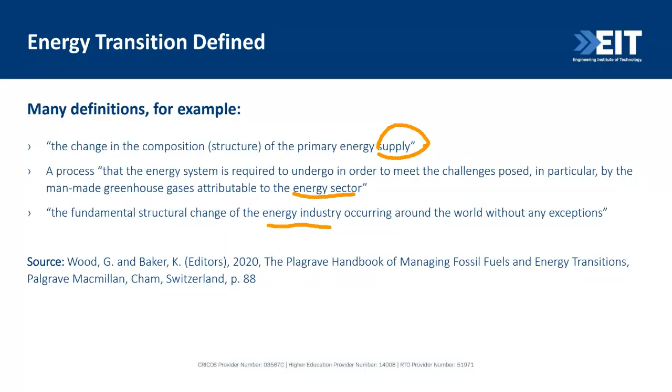If we think about having a sustainable future, energy transitions are not a new thing, and there are past, current, and upcoming ones. We've got a current one, maybe the fourth. Is there a fifth energy transition after that? Generally these may take 50 to 75 years for the new technology to become dominant.

For example, we've gone from wood to coal, coal to oil, oil to gas, gas to say renewable energy as a transition. It's taken roughly 50 to 75 years for the new technology, for example coal-fired power, to take hold within electricity generation. Now, do we have that amount of time for this current transition? That's the main thing, guys.

When I talk about this, I'm an engineer, but I know it's not just about engineering, it's about economics, finance, I've got this below here. Engineers may be honed in on engineering, but no, there are environmental pressures. I spoke about, for the air, which we're concentrating on at the moment, greenhouse gas emissions, but also the water and the land.

There are economic and financing issues, government policy settings. Government should not tell us what technologies we should go for, whether it's nuclear, electrification, hydrogen, and so on. Government should set the policy settings. So, for example, a private business would come up with the best solution. Obviously money comes into it, so there's a good balance between going for the best available technology, how much it may cost, and what the future holds too.

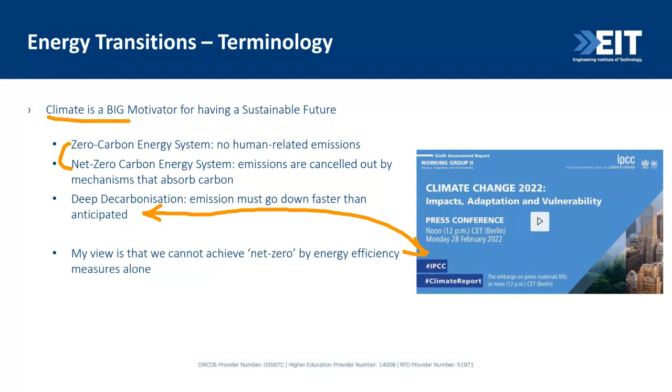So where have we come from? Like I said, energy transitions are not new. If we go back around 250 years, to the 18th century, the 1780s, wood was being burned, especially in the UK. Then in the UK coal became the dominant technology.

Then around the 1860s, 1870s, oil came into play. In Pennsylvania oil was discovered, so oil took off, and we had a combination of coal and oil. It's interesting to note that the UK is probably the only country in the world that's been burning coal the longest, for around 250 odd years.

So we've transitioned away from these very carbon-intensive fuels, coal and oil, to another fossil fuel - gas is still a fossil fuel, but it has much lower emissions per unit of energy, for example. Now we're moving into the renewable sector, and the next one is electrification.

Renewables have actually been around a long time. In Australia, in my state for example, during the middle of the day we'll probably have around 35 to 40% of the grid from renewable energy, mainly rooftop solar on houses. So renewables are coming into play.

They're actually much cheaper now in dollar terms - cheaper than coal, oil, or gas. And if you've been following coal, oil and gas prices, they've gone up this year. It's interesting because of geopolitical forces - there's a whole bunch of geopolitical issues and forces driving all of this.

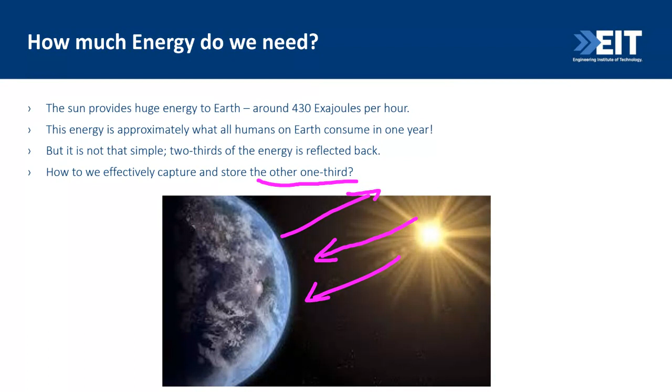Solar panels are great, but also because of the sun, we have wind and so on. So we can have wind turbines, but then we need battery storage. So you can see, I start talking, I can capture this, then I've got to capture with solar. Maybe I can capture with wind, then I can store it in a battery. But then how do I release it for energy consumption later? So there's a whole bunch of issues here we've got to think about. It's not as simple as it seems.

What can we do as consumers? This is taken from an Australian government website, yourhome.gov.au. You can look that up if you like. The traditional meter we have here in Australia spins round and round and round, but now we have things like smart meters. What a smart meter does is, I know at this time of the day the power price is very expensive, so I'm not going to run my air conditioner now, even though it's 40 degrees C.

I think I might run it though, because I need some comfort. So again, it helps you make a decision. Should I actually turn on this electricity guzzling device, an air conditioner, which is say 5 kilowatts? And if I run that for a few hours, it's going to cost a lot of money. And also the electricity grid is going to suffer because everyone's demanding it.

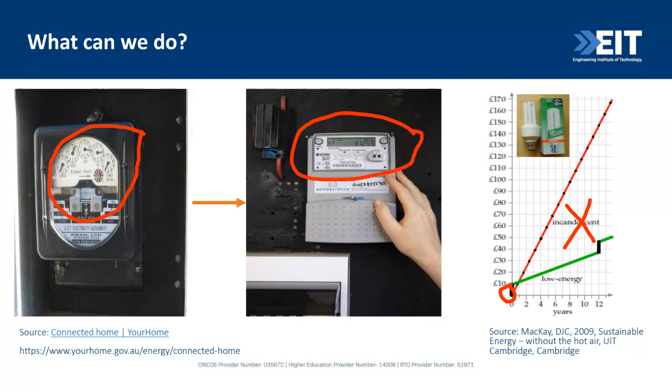Let's have another look at incandescent versus LEDs. So incandescent, I'll put a big cross. I don't like those anymore. Always go for LEDs, guys. Over the period of, initially you're going to pay a lot more for an LED. This is from a British reference, but in Australia we'll pay a bit more, but over the long run, definitely much better and more reliable too, and a longer life.

Okay, I've spoken about us domestic consumers. There's also commercial, mining, and like I work at a refinery, so we're a huge user of energy. Okay guys, so yeah, we have to look at how do we get more efficient, but also decarbonize. So as you can see, the energy system globally is very complex.

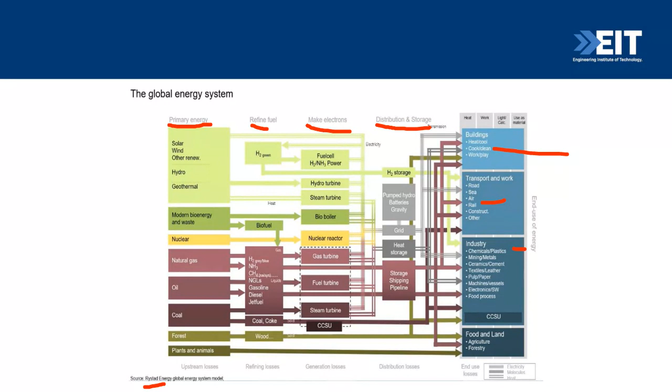Again, I said look at the primary energy sources here on the left column, or the left bars, for example. There's a whole bunch of technologies there. Which one is the best? Yeah, again, coal is sort of going out. Oil will go out. Natural gas is not having a good time. Methane emissions are no good. So these are the baddies at the moment.

Nuclear, I'll draw a bit of a question mark there. Geothermal, obviously, a bit of a question mark there. It's available, but not easy to get. But obviously these ones here, solar and wind, bit of a tick, and hydro too. But hydro is a problem. Australia's a bit of a dry continent. We've had a bit of rain lately, but do we always have water available for that? And there's a whole bunch of stuff on the right here, again, food and land, agriculture.

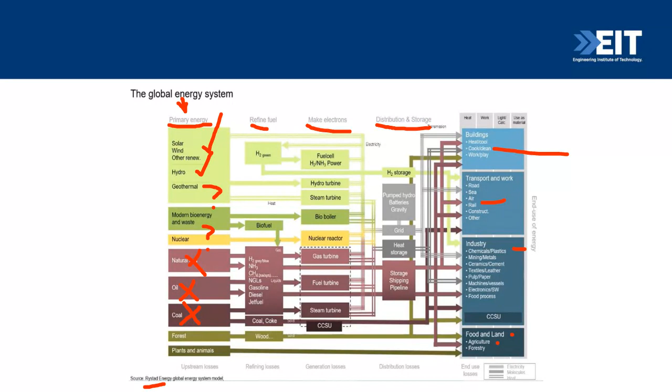Okay, so as you can see, the global energy system is not as simple as make some electricity and pump it through the system, and we have an output for boiling water, cooking, and so on.

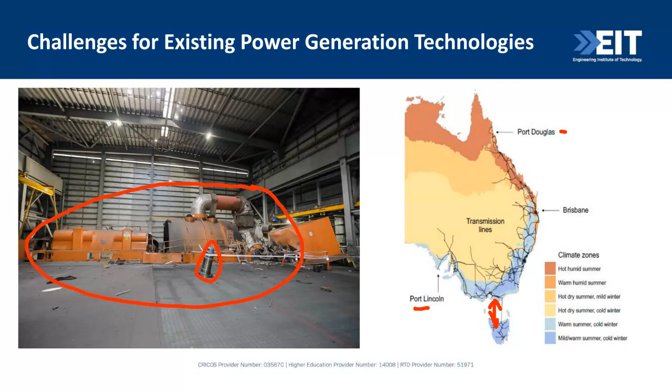Some of the challenges: there was a turbine generator set that blew up last year, as you can see there - this is a piece of the shaft between the turbine and generator. Luckily, no one was injured or worse, but that caused $200 million of damage, and it's offline for 18 months. This is a coal-fired power station, and when that went off, the power prices went crazy. So there are challenges now with aging coal-fired technologies - how do we replace those with wind or solar?

About 10, 15 years ago, coal in this state was 80 to 90% of the generation, and we got a bit of hydro too, so that was also in the mix along with gas. But now coal is definitely going down, whereas renewables are coming up.

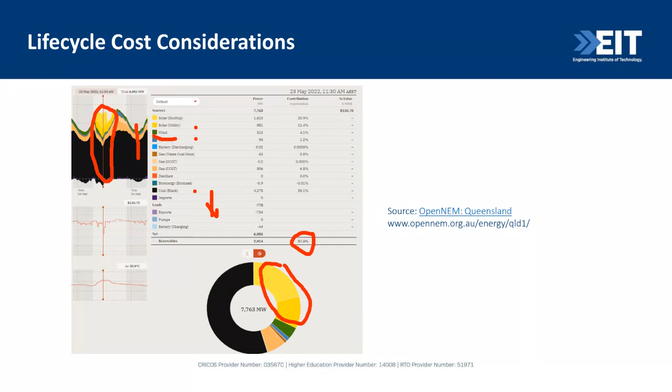But at night, there's obviously nothing for solar anyway. There might be a bit of wind. So the challenge is, again, how do we have batteries come into play and discharge an amount of power for overnight use?

Now, over the whole life cycle of any energy asset, it's not just power stations. What do we want from that asset? What do we want from our demand devices? We want to have affordable cost. We want to have electricity available 24/7, and it has to meet every time I switch something on, it has to be there.

And zero or low carbon energy obviously now has really come into play. Within the state of Queensland here in Australia, electricity is actually classed as an essential service. There is legislation in place that electricity has to be supplied. I'm not sure what happens in other jurisdictions, but I know we have it on 24/7. We do have the loss of power every now and again, and people go sort of crazy when it does go off for an hour or two.

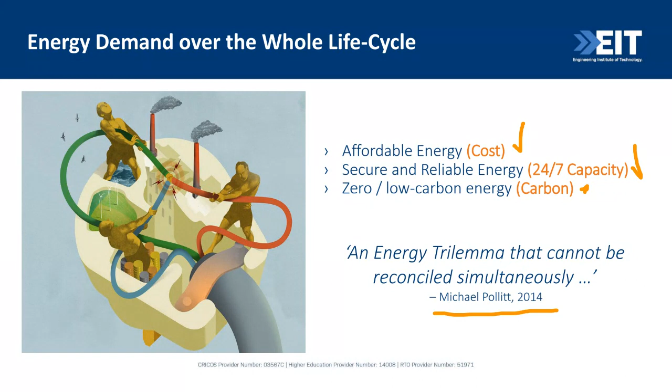Can we sort of reconcile this simultaneously? Michael Pollitt from the UK spoke about this 8 years ago. So again, we've got all these three levers pulling on each other, and we try to reconcile those all together.

In Australia, a wind farm was offered to a community in the southern part of Western Australia, and they actually rejected it because they said, we don't want wind turbines, they're too noisy. This was about 10 years ago, guys. So they said, no, I don't want wind power in our backyard. We want something else, give us another sort of power supply arrangement or deal. So that was very interesting.

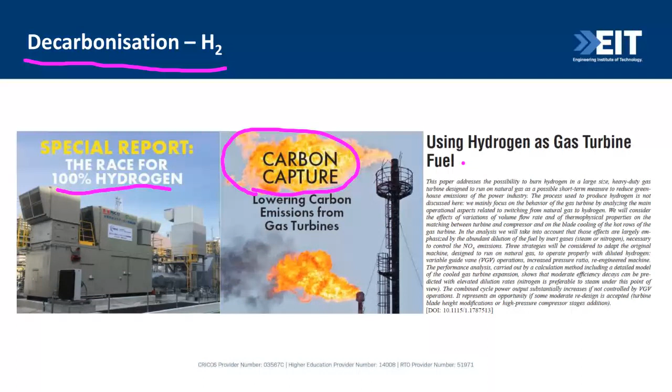Thank you. So I'm going to look at power generation and specifically a thing called the gas turbine, which is a more recent source of power. There's been some talk about 100% hydrogen, carbon capture. Some people in Australia are quite cynical about carbon capture. This is a journal article from 2005. So when you hear about hydrogen and decarbonisation, those words have actually been around, not just since 2018 and beyond. They've been around since the 2000s, if not before that.

So when we look at hydrogen, a quick poll again. I should type this in, what I'll do. I've got to do it on the fly, at the same time. So I'll just type this in, everyone, and then I'll put it up, hydrogen. Okay, I'll start that. The reason is I can't store these questions, I have to do them live.

So is it hydrogen or electrification? What do you think?

Or near full electrification? Should we just say yes for hydrogen and no for electrification? Yeah, sorry, my apologies, guys. So yes for hydrogen, no for electrification. My bad there. Thanks. Yeah, it'd be good if we could store these questions, Riley? Yeah, it would.

Anyway, it's coming in. That's good, we're getting some responses coming in, and the yeses are way ahead of the no's at the moment. That's really excellent. So can I show that?

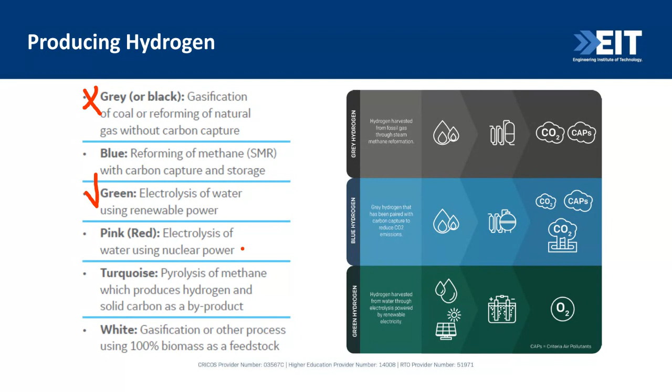There are some challenges to hydrogen. Looking at the heating value on a volume basis, it's a third less dense than CH4 methane, so we need larger pipelines. Also, the materials used for pipelines have to be properly selected, because there's a thing called hydrogen embrittlement, which can be a problem for pipelines.

The flame speed of hydrogen H2 is actually much faster, so in a turbine, the combustor design has an issue. On safety, if you know your history, some people refer to the Hindenburg from just before World War II. It went up in flames, and it wasn't a good day for hydrogen back then. From a safety point of view, hydrogen is hard to see as a flame.

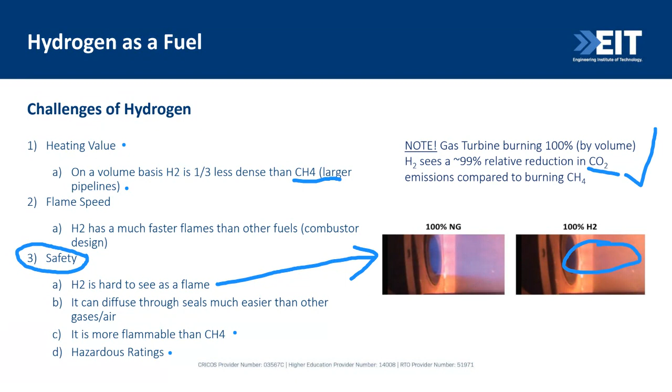Note, if we have a gas turbine that burns basically 100% by volume of hydrogen, it'll see a 99% relative reduction in CO2. That's cool, that's great. So we can actually reduce our emissions to zero almost. That's fantastic, but we need to get that hydrogen supply, and we need to have a lot of it flowing.

Now, gas turbines for power generation - I'm concentrating on a particular aspect of power generation. Some people think fossil fuels are gone, so gas turbines will be gone in power generation and in aircraft eventually. But at the moment, to 2030, sales are increasing. This is in US dollars, from a magazine called Turbomachinery, which is really good. But it may plateau off. So again, is hydrogen the solution for turbines, for example?

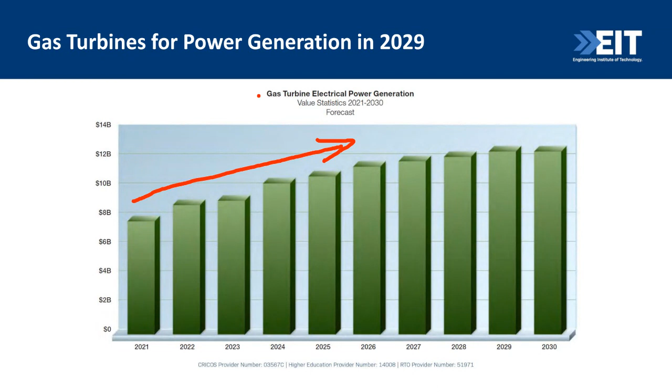Where to next? A table highlighting the advantages and disadvantages of various power generation technologies, gathered from various sources. In Australia, we've got heaps of coal, black and brown, but very dirty. They've got low operating costs, but high capital costs, and very high emissions, so not good there. A new power plant in Australia - I'll put across because no bank will support the funding for a new coal power plant, for example. And it takes a long time to bring them up to full load.

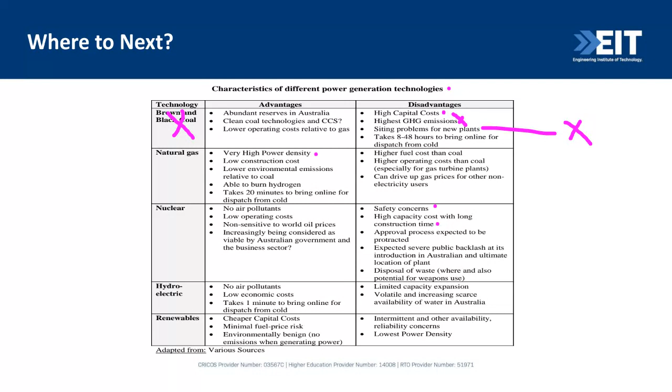Nuclear has some issues on safety, and they have a long construction time, and they're very expensive. There's a severe public backlash possible in a country like Australia.

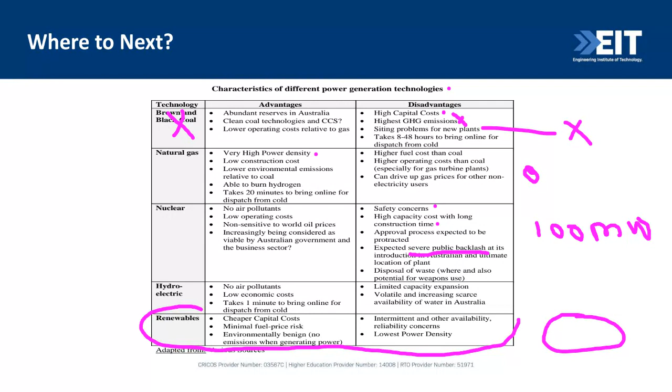Renewables now are coming into their own, but the biggest thing is the intermittency, availability and reliability concerns. They also have a very low power density. So if I want to generate, say, 100 megawatts, the land area for a gas turbine would be very small. But for a solar power plant, I might have a much bigger area. So a gas turbine power plant would be much smaller than a solar power plant - that's what I'm talking about in terms of power density.

Within Australia, our power generation mix, we're looking at doubling renewable generation from now until 2050. I think a lot of countries are trying to go that way too. Just to mention this diagram briefly, coal-fired power is down the bottom in the black and brown there.

So by 2040, we have no black coal or brown coal in Australia. Similar for gas, we're going to have gas until 2050, only a very small proportion. The rest will be hydro, large-scale storage, batteries, wind, pumped hydro, and so on. This is from the Energy Market Operator in Australia, and there's the reference there if you want to look that up. Just note, coal will be gone, and I'll draw a big cross by around 2040.

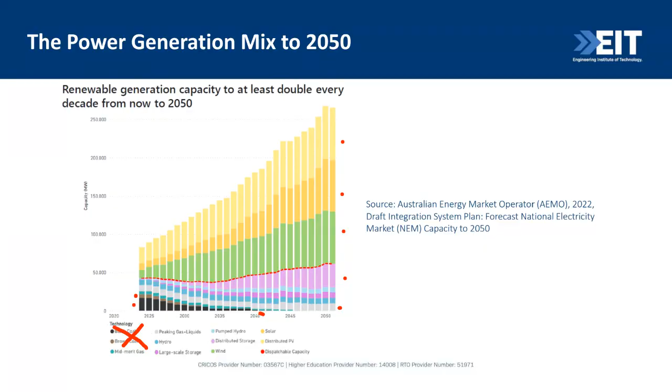So I've spoken a bit about engineering and stuff, but what about us, the people, the skill sets we need? As an engineer, it's not just about engineers, okay? Everyone these days, we have connections. We crave our connections. Pioneering products, innovation is a multidisciplinary thing, it's not just engineers that do that. Mechatronics is more important, but also data analysis and sensors.

So we're wired with sensors. We crave our connections, but being able to have access to data, real-time data, and processing data. Where I work at our power plant, we have heaps of data available on our machinery, but I need to be able to diagnose that and interpret that for management, for example. Other things, software is expanding all the time, but cyber, the darker side of things, always be aware of things like cyber, okay?

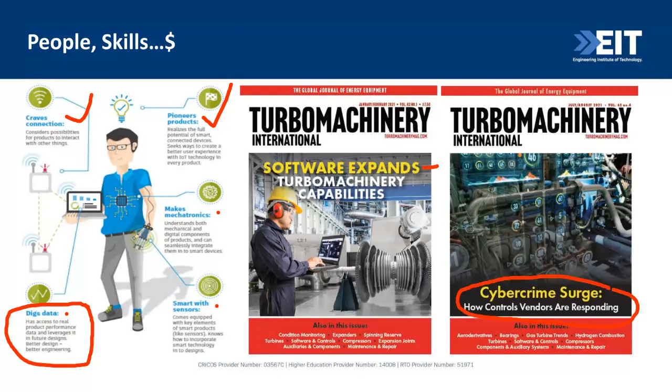In Australia, we've had a change of government now. So the oil and gas sector could face new pressures under the new government. And here in Australia, coal exit - coal is actually exiting faster than what they thought.

Just to round up, what's possible - there's a suite of technologies that will be required. So we have solar, wind, large-scale battery, pumped hydro, run-of-the-river hydro, nuclear power, hydrogen-fueled gas turbines or boilers for making power, electric vehicles, electric aircraft, electric trains, hydrogen-powered ships or ammonia. Ammonia is another one for shipping, so even shipping is going through a transition.